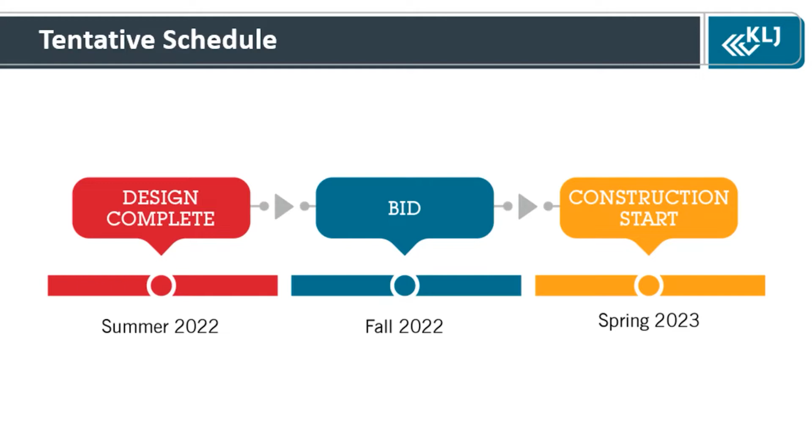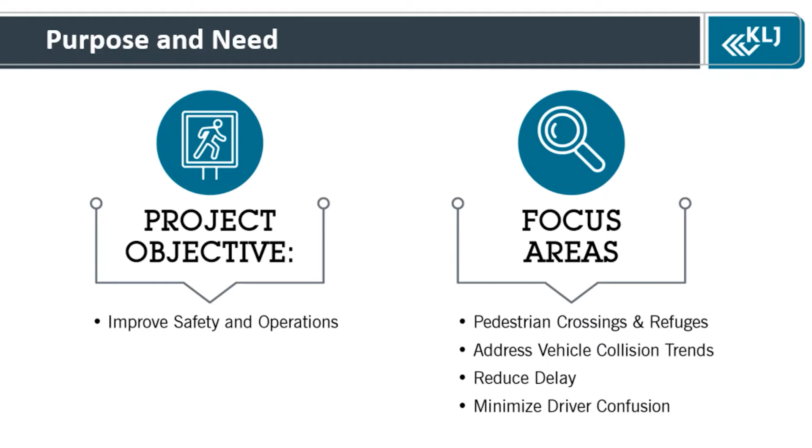The main objective of this project is to focus on safety and operations of this intersection of Washington Street and Bismarck Expressway. We have several focus areas that we're looking at: first off, our pedestrian crossings and refuges. Also, we want to address vehicle collision trends. We want to reduce delay, time people are sitting at the intersection, and also minimize confusion from drivers.

With this project, there's actually four projects that will be built at a parallel time frame to this project, and they will likely all be awarded to the same contractor and be built by him. So the first project, the one that we're talking about here, is the little yellow spots over by the Washington intersection. But at the same time, there's going to be a mill and overlay and ADA project along all of the expressway past Main Street here, where we'll be fixing the pavement and addressing any curb ramp issues that don't meet ADA requirements along the project.

Also, University Drive, 1804 going south past University of Mary, we'll be addressing the pavement on that with a mill and overlay and looking at all the curb ramps and lighting, upgrading the lighting to LED lighting on it.

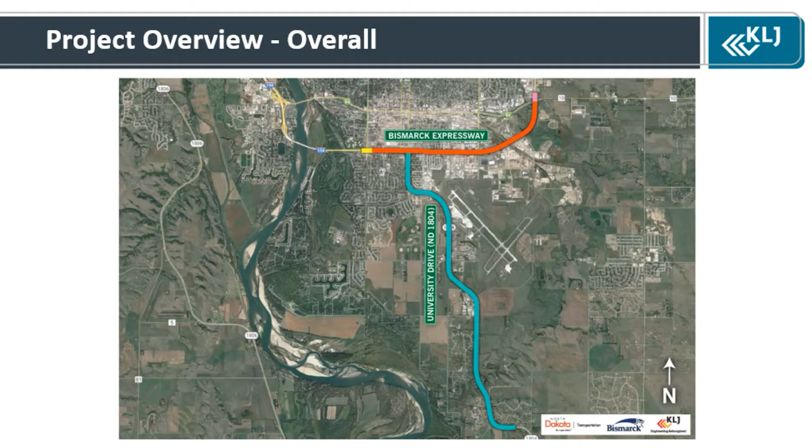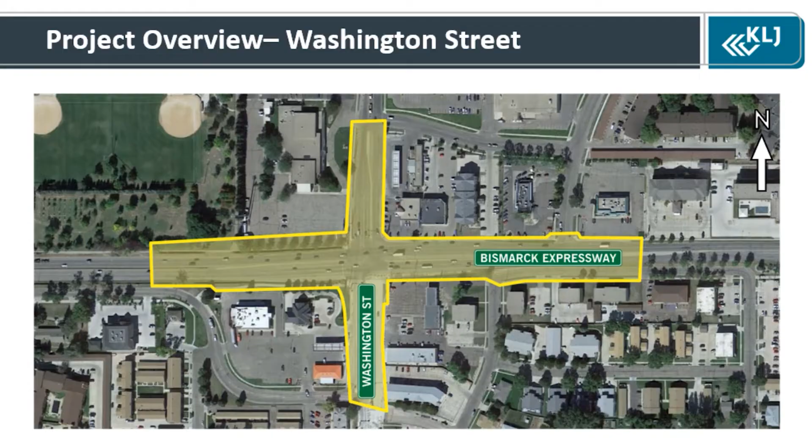As I said, we were focusing this project, or this meeting, on the Washington Street intersection. This is the boundary of the area that we're looking at that will be impacted by this project. So what are we proposing on this? That's the biggest question all of you have, I'm sure, and that's why you're here today. So this is how it looks today out here. You all are very familiar with that.

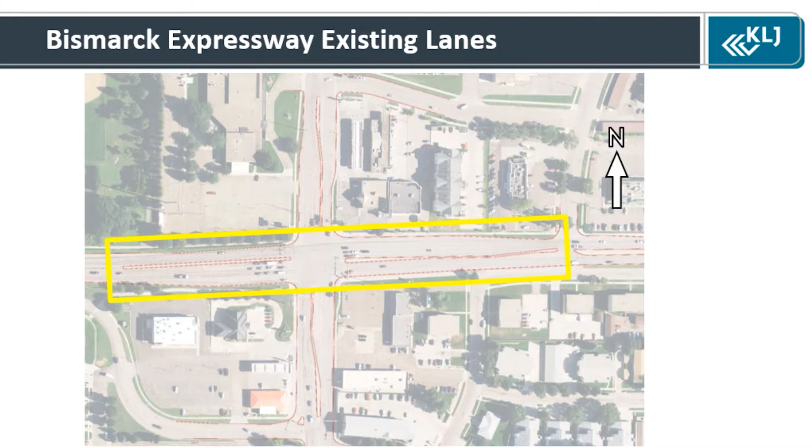Starting off, I want to talk about the expressway and what changes are going to happen along the expressway here. So the existing layout of the intersection, you can see that there's some kind of strange things going on. We have this existing skew where we have cars going through here. It doesn't line up with the receiving lanes, and people have to turn an awkward direction in the intersection. We also have three through lanes.

The third lane starts right here and merges in right here. Nobody really wants to use it on the south side, so we have three turn lanes there. It's kind of an awkward configuration, provides some confusion that we want to address.

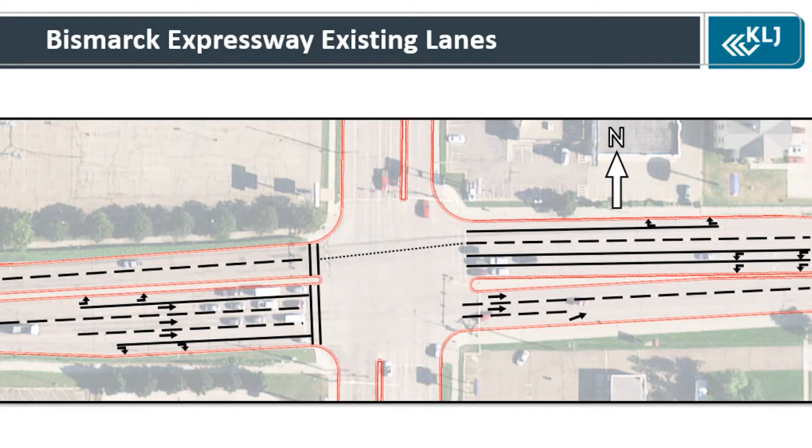This is tentatively what we're thinking of changing it to. Specifically, looking at the intersection here on Expressway, we want to align it so cars can intuitively follow it straight through without that awkward change going through the intersection. We get the extra space to do that by removing the third lane on the south side.

We're keeping the outside curb line without changes throughout the whole project, though there's a small curb line change here bringing the curb into the roadway more for additional green space. Otherwise, we're basically matching existing conditions on the outside. It's only the median curbs and median islands that will be changing.

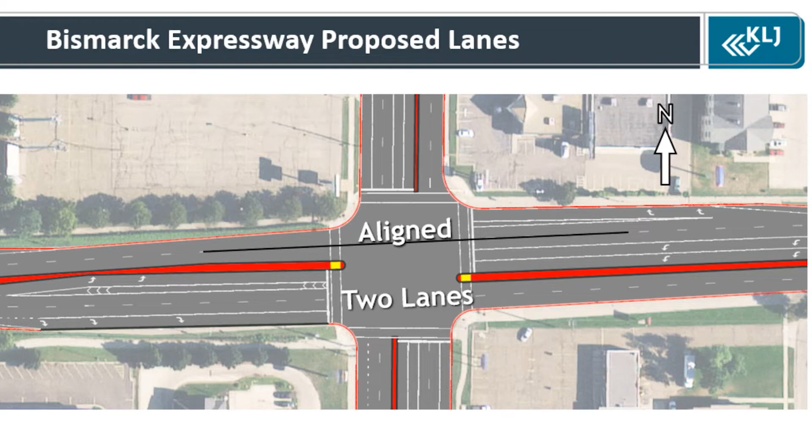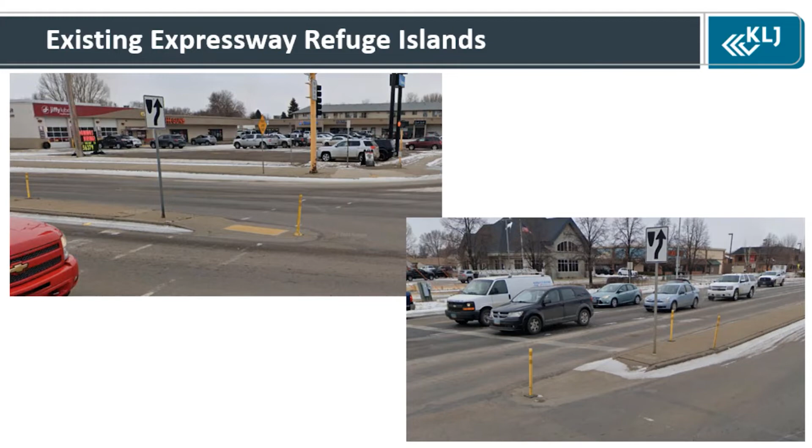We also want to focus on pedestrian facilities here. As you probably know, the pedestrian crossings on Expressway are mediocre—very tiny, with one little spot to stand in, no push button, and an unsafe-feeling refuge island. We want to address that by fixing those refuges to provide the required 6-foot refuge space for pedestrians crossing, along with a push button at the intersection.

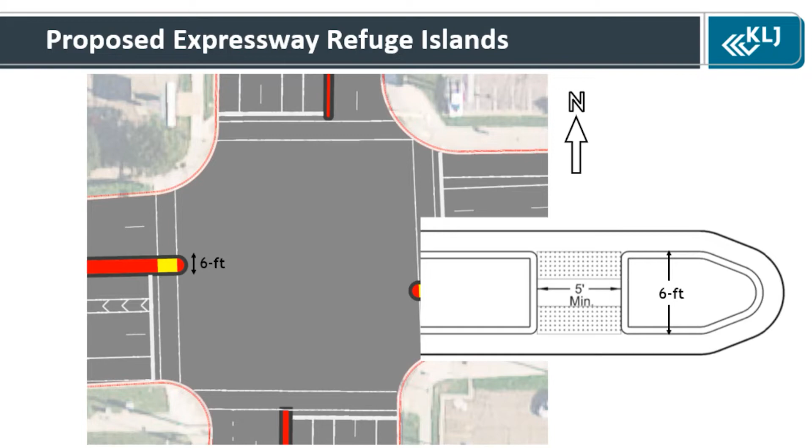It would essentially look like this, with curb lines protecting you on both sides, 6 feet of refuge, and a push button in the middle so there's somewhere safer to stand if you get caught in the intersection. Here's an example of what that could look like when built—curb lines on both sides, push buttons in the middle, a refuge island where you aren't standing right next to traffic but have a place to stand.

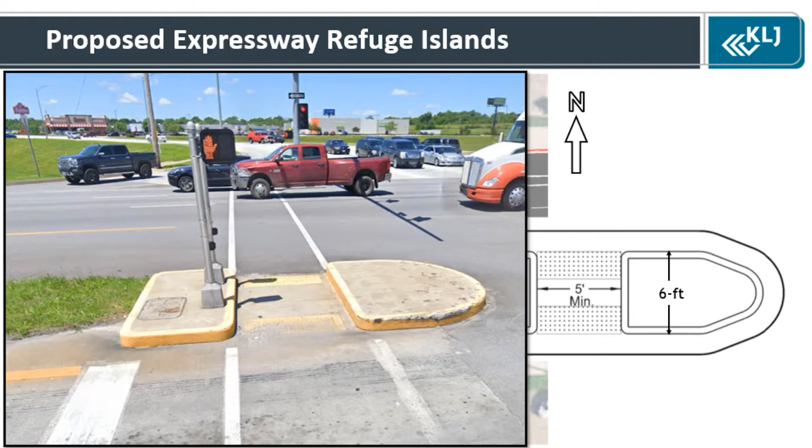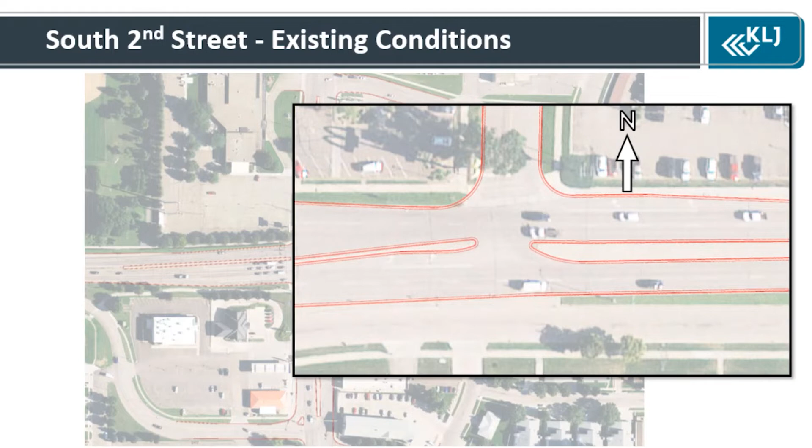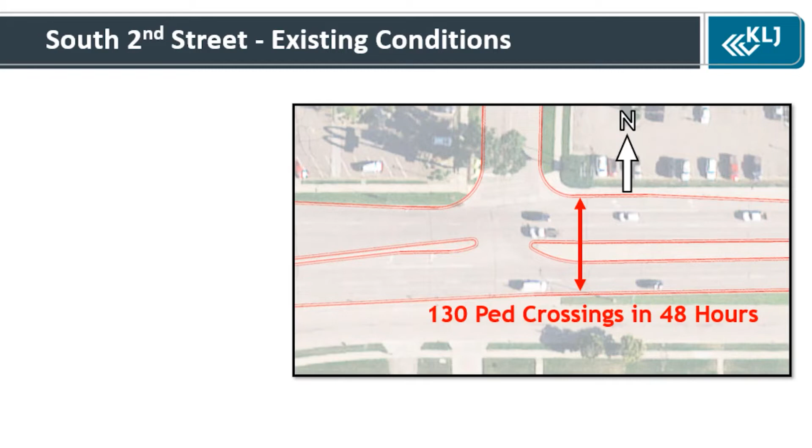This project also looks at the 2nd Street intersection. There are a couple of things that need to be addressed here, and the DOT performed a traffic study to look at the best options. First, there's a high pedestrian crossing movement on the east side of the intersection—in a 48-hour period, we counted 130 pedestrians crossing right across by Perkins.

Here's a security camera photo showing a person crossing there. It's a very prevalent move, and it's not delineated—there's no marked crossing. It's not safe on a high-volume roadway with a lot of traffic. We're also seeing a total of 51 crashes in the DOT's study period, mostly between the southbound and westbound movements, with common angle crashes. These are some of the safety concerns we want to address.

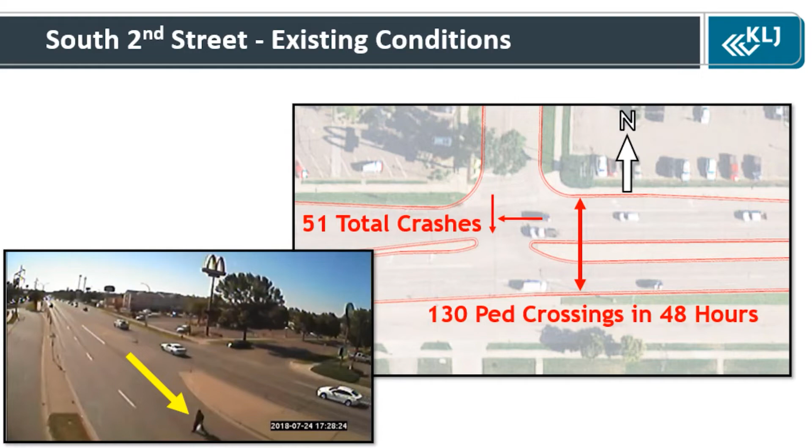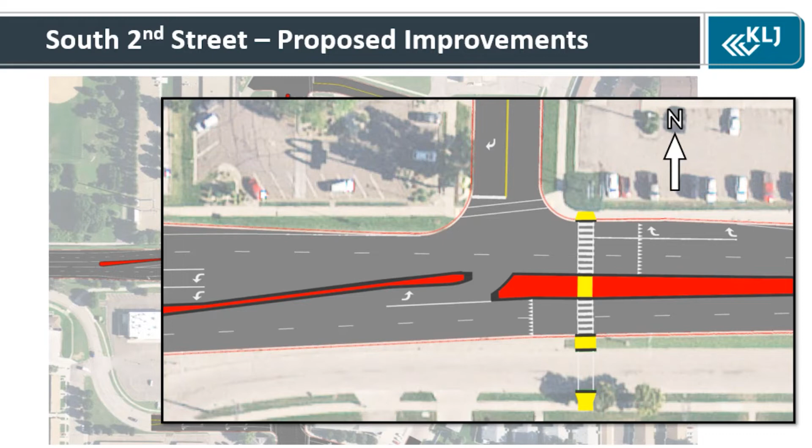So what are we planning to do? DOT's report indicates we should look at possibly removing the southbound left turns to prevent angle crashes from people darting across four lanes of traffic to reach that eastbound lane. We also want to add a nice, delineated, marked pedestrian crossing here where vehicles can stop so pedestrians can safely cross in this high-traffic area.

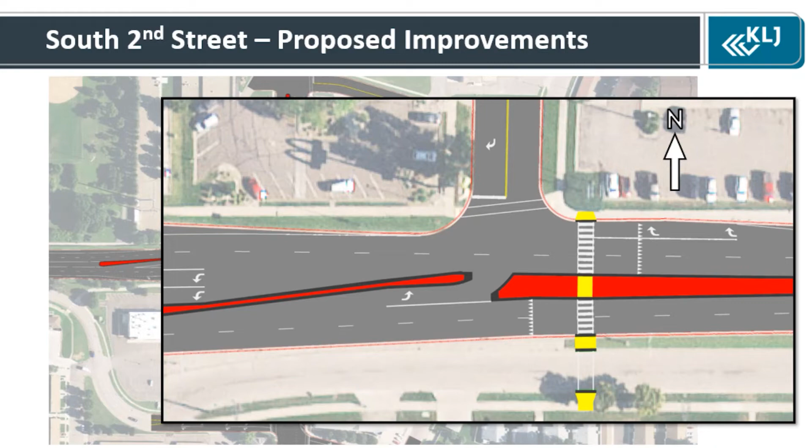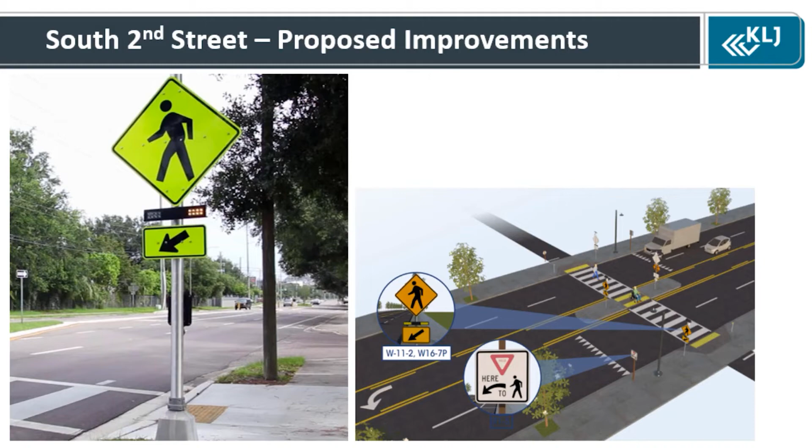The pedestrian crossing will include what's called a rectangular rapid flashing beacon—pedestrian activated, you push a button, and it has flashing lights specifically designed to grab attention with their pattern. It has a high success rate of getting vehicles to stop and recognize a pedestrian waiting to cross. We want to add those here, along with a high-visibility crosswalk and signage to allow for the crossing.

So on a ground view, as you go west or eastward here, this is essentially what it would look like. We have Perkins here, McDonald's is just off the screen over here. So we're driving past here, we have this signage that may yield, we have a crossing coming up here. We have a pedestrian activated flashing beacon, so these are shining at you.

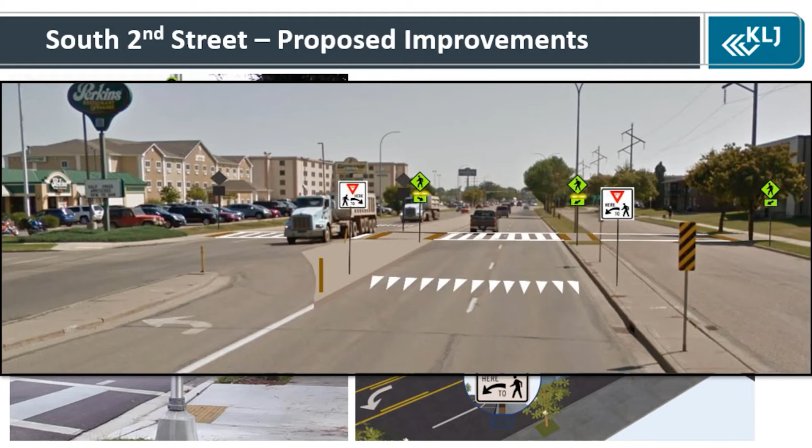They can cross to several refuges going across the intersection. It should be a much safer way for pedestrians to get through this area and hopefully avoid any accidents in the future. And we're looking at doing these safety measures specifically because the FHWA has done a lot of study on these, and they're proven safety measures that have shown to reduce accident probability at these intersections.

So this rectangular rapid flashing beacon, that flashing light that I showed you there, the Federal Highway has studied it, and they say there's about a 47% reduction in crash rates when these are implemented out there. So that's a huge benefit.

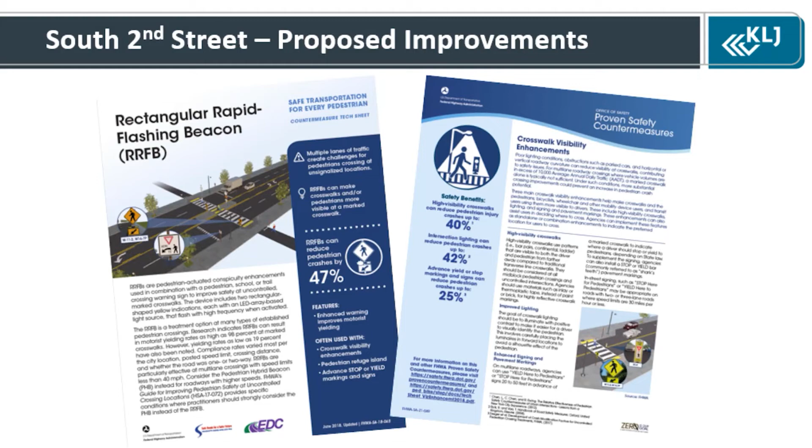Also, with the high visibility crosswalk and the signage that they have out there, we're seeing like a 40% reduction with the visibility of the crosswalk, and the extra signage another 25% reduction in that crash rate. So these are some highly beneficial, low-cost items that we can implement here to improve the crossing and make it a safer environment.

Next is Washington Street. I want to talk about what changes we'll be doing on that as well. And the changes on Washington Street are a lot more minor compared to what we're doing on Expressway. Basically, the intent of the changes is to increase the parking queue length that we have for people making the left-bound turns, the northbound and southbound left turns here.

Right now, the turn lanes are, per the study, a little bit inadequate. We want to increase them as much as we can to improve the operation of the intersection and allow for the best flow of traffic.

We will see a small reduction in the turn lane here going into the Elks Lodge, and then on the south side here going to Denver Drive, we have to reduce those a little bit to accommodate the longer turn lanes. But that's mostly what we're doing on Washington Street.

Another improvement that we will be doing is just restriping the right turn lane and allowing people to make a through movement, a through right for that turn also. So it can be an additional capacity turn lane for people wanting to go through and make a right after the intersection.

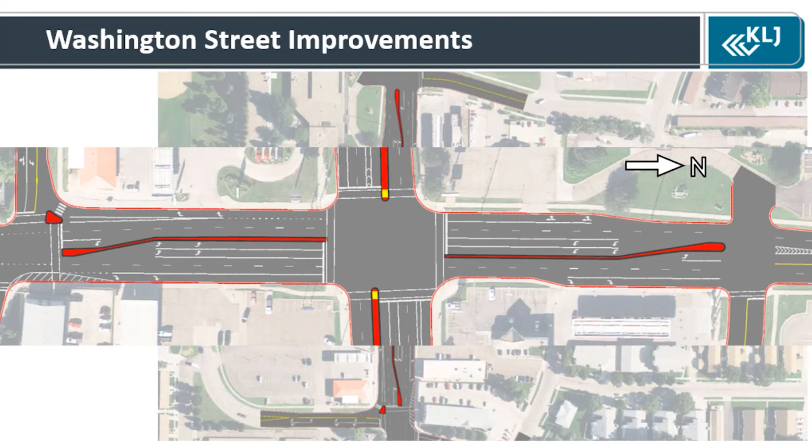So there's always impacts with these projects. First off, who pays for these projects? Where is the money coming from? This project has a very high federal matching rate, is what I want to say. The federal highway is paying 90% of this project because it's a safety project.

They want to really promote these safety type projects that have a high benefit with a low cost. The remaining 10% is split between the state government, the DOT, at 5%, and local at 5%. I spoke with Gabe, the city engineer here, and he said that for the local 5%, historically the city commission has used the city sales tax to pay for these types of local fundings. The ultimate decision will be theirs, and they can choose to do something else, but that's historically what we would expect them to decide to do.

And if they ever chose to try to bring it about as an assessment, there would be a protest period and it would go through the regular assessment process, but it's very unlikely that will happen, and you'll be notified if that ever does go that way.

Another impact, obviously, is construction out here. The construction of the project will have a capacity impact to this corridor. As you can see, we can't dictate exactly how the construction will go out here. We can only put some constraints on the contractor, some requirements to phase his construction, and the ultimate phasing of the construction plan will be his decision.

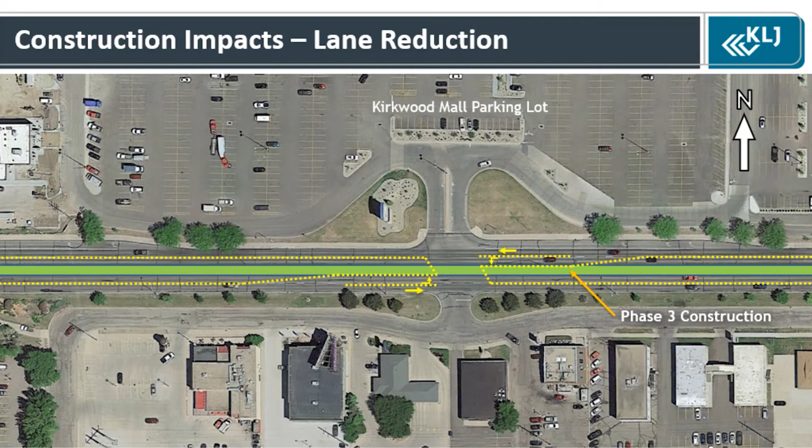So these are some of the requirements we'll put on this. To accomplish that, this will likely be built in 3 phases: phase 1, phase 2, phase 3. Basically, in order to accommodate the through lanes and the turn lanes, it'd have to be about a 3-phase construction out there, unless something such as night construction is used. There might be some flexibility to do some alternate methods in that, but this is likely what you'll end up seeing with construction.

And I'm sure all of you have a bit of a question about, okay, you guys just worked on Washington Street all of last summer. Why are we going here again? That was a horrible, long construction period, and we don't want that.

So what happened last summer? The construction project last summer was, I believe, triggered mostly by the need to do a water main project here. They were doing a lot of water line improvements, deep earth improvements, so that's why it was dug up for such a long period of time. And going back after that, they had to reestablish the roadway, and they decided to use concrete to do that.

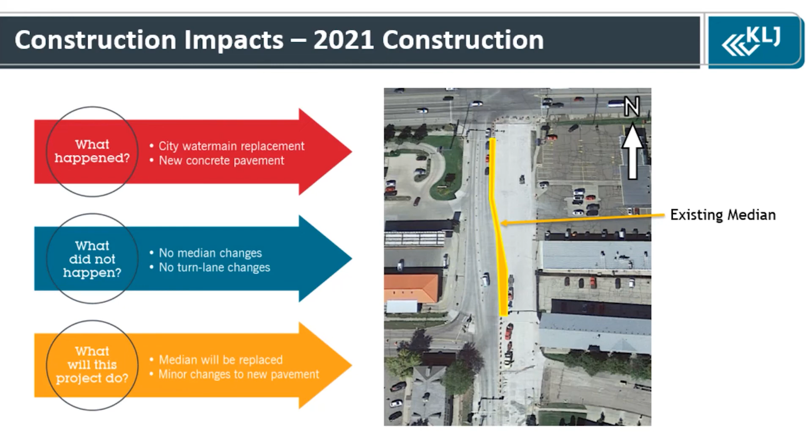So it wasn't a reconfiguration of the intersection. The existing median here never changed with the project they built last summer. They basically kept the same configuration, kept as much existing surface improvements in place as they could, and improved the pavement out there when they did this.

What our project intends to do is move that median curb so we can increase the turn lane of that northbound left turn there. We would keep as much of the existing improvements in place as possible. We don't want to waste money, obviously, there's no need to take that up. We can maintain two lanes of traffic the majority of the time with only very limited disruption, so it'll be very minor disruption with very minor changes to this intersection with this project.

And I want to remind you that this will be 2023 construction, so that won't be happening this summer, it'll be the following summer. So you'll have a break here.

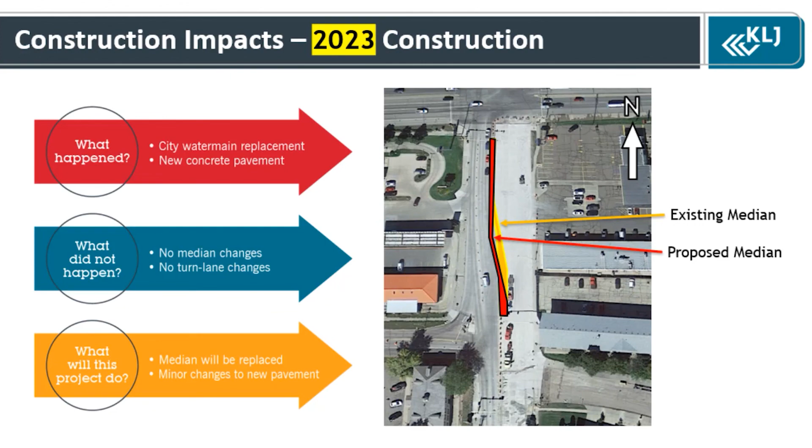This is just a more detailed view, a clip from the project that was built last summer, showing the layout of it. I just want to emphasize that the existing curb line here didn't change. It's still there. We'll be taking it out with this project, so it's not a waste of money that they rebuilt last summer. We aren't wasting that.

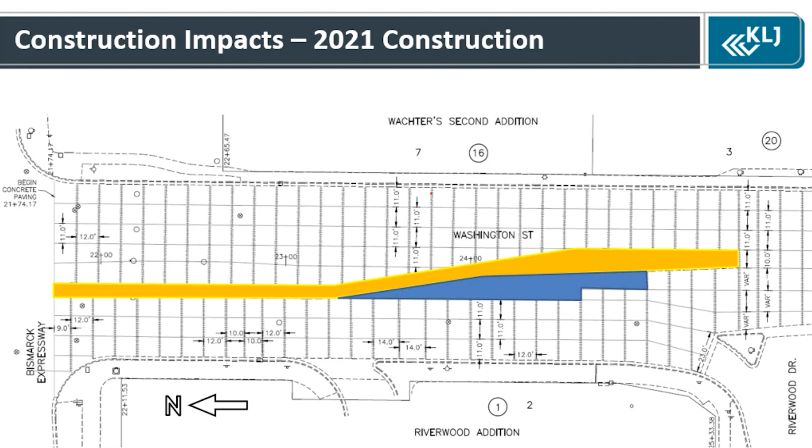What we're doing is taking out a few panels of the concrete on this side here in order to move the new curb line over to accommodate the new turn pockets. So we'll be keeping as much of the existing improvements in place as possible and having as little impact as possible with these improvements.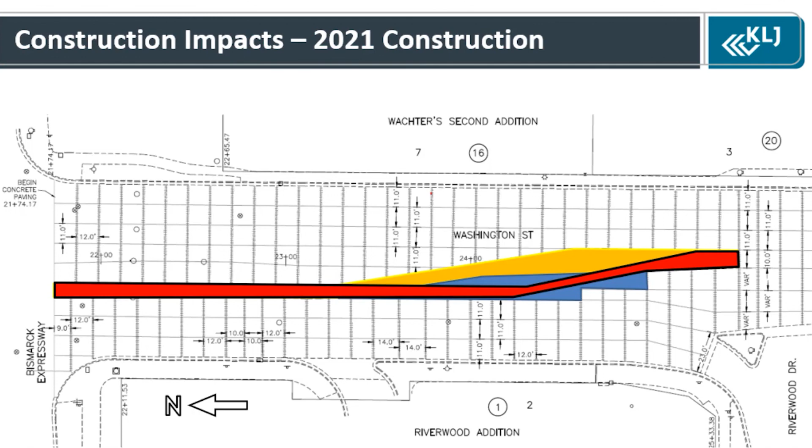And again, that's a 2021 construction. That kind of wraps up a lot of my presentation here.

So we want to hear from you, and we want to have documentation of what you guys think of this project. Are there parts you like, parts you don't like? We want to know what those are.